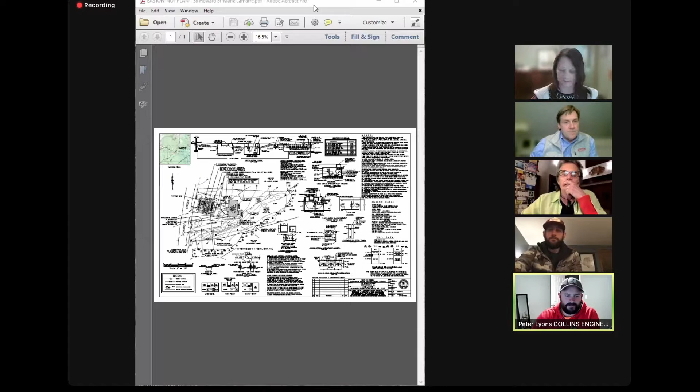Okay, just gonna pull up the plan. Can you guys see that? Kinda, a little small. Yeah, here we go. Thank you. Let's see, all right, we'll start with this.

For the record, Peter Lyons with Collins Civil Engineering Group. We're representing the homeowner tonight for a filing relative to the repair of a failed existing septic system. This is on the east side of Howard Street. The bordering vegetated wetland is on the southern portion of the property and then cuts through the backyard, the eastern portion of the site.

It starts in the woods and then kind of turns into the existing tree line once we get onto the subject property. The 50-foot buffer cuts through the middle of the site, and the 100-foot buffer is out here, basically where our proposed work is.

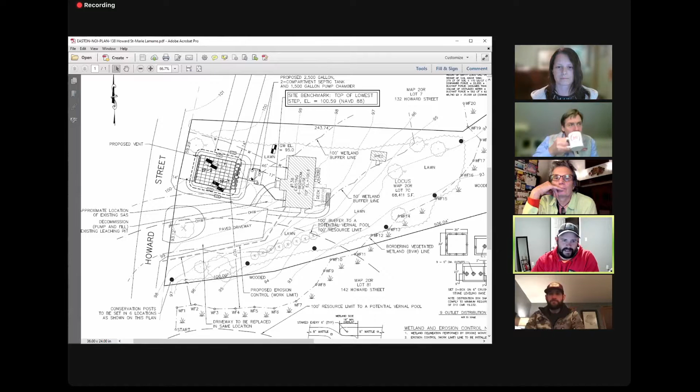So the scope of work for this: we're replacing the existing septic tank with a tank and a pump chamber, and then installing a slightly elevated leaching bed in the front of the property. The general plan is that it's really the corner of the yard that is farthest away from the resource area, without interfering with the existing water line. If we moved any closer to get further away from jurisdiction, we would ultimately have to move the water line.

We only got a couple feet to play with as it is, so that's why we're putting it where we are. The system itself is proposed at 107 feet to the closest wetland flag. The tanks are just inside — it looks like it's about 95 feet to the wetland line.

We have erosion control starting at the corner of the house and wrapping around the existing driveway. That's going to encompass the work area, staging for the trucks and everything, as well as the excavation itself happening for the new system.

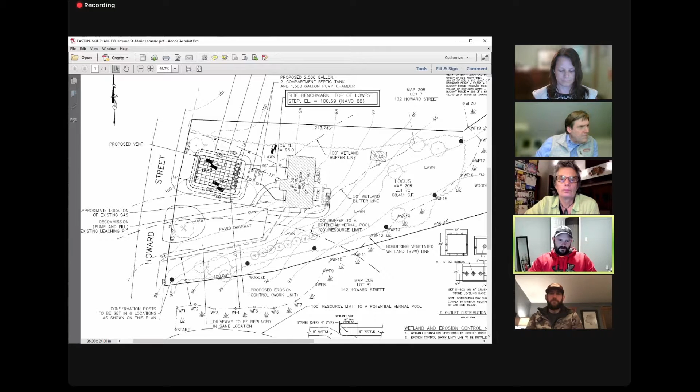All the work's being done in the front yard within the limits of the erosion control. We're proposing conservation posts along the existing tree line, basically paralleling the wetland line. There's a total of 6 posts, I see. Let's see what else, we have...

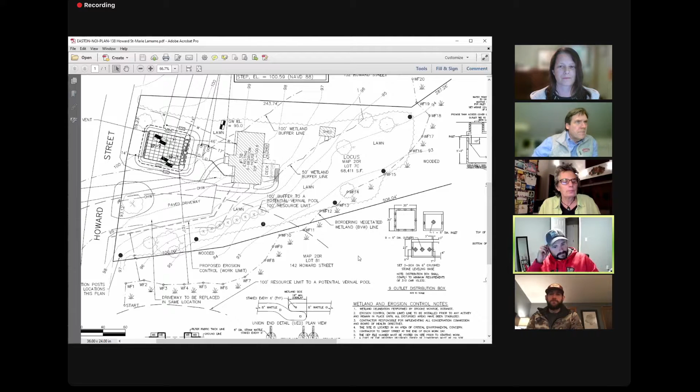Our erosion control details, including a new union detail we've been showing where the wattles are tied together. Other than that, our standard notes — keeping the site clean, file number to be listed on site. Yeah, I guess that's a quick overview. I'll take any questions from the commission.

Jennifer? Peter, did you just want to show us the vernal pool and explain what you're doing to the driveway? All right, let's see.

Yeah, so the vernal pool occurs off-site to the south. We don't show the vernal pool itself on the plan, but this is the 100-foot resource limit to the pool, and then the 100-foot buffer to the resource limit. Correct me if my wording's off there, but yeah, 100-foot buffer to a potential vernal pool resource.

So this is the edge of the resource itself, and then the 100-foot buffer to that cuts through the paved driveway.

Speaking to the driveway, it's to be replaced. It looks like it's going to be the same footprint. So honestly, I wasn't even aware of the driveway thing, but Jen, maybe you know something I don't, but it looks like they're just going to be replacing that driveway. Same elevation, yep, we don't propose any elevation changes. They might adjust the grading, minimally within a couple of inches just to get it back to level, but no significant grading from the looks of the plan.

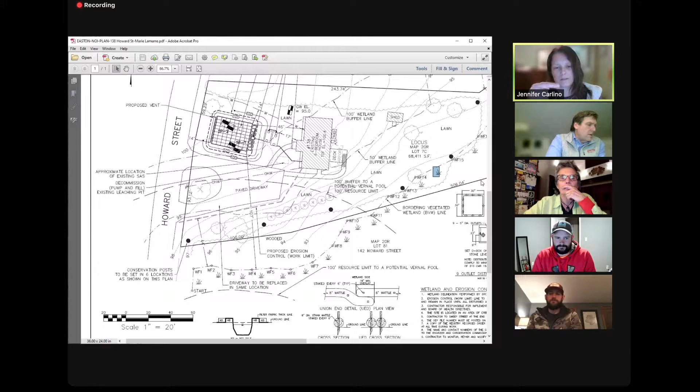If they're grading it toward the vernal pool, it's only going to be an inch or two, as Peter said, and any stormwater would go right into the grass and be filtered there. So I don't think that's going to be an issue for them.

Yeah, I mean, the driveway's pretty level as it currently is configured, so I'm not overly concerned by it. So yeah, they're not changing existing conditions. I think maybe we'll just condition that it is to be no worse than it already is. So I think that's probably the best approach there.

Yeah, I mean, Peter, the one thing on this property is two things. One is they've got to let that grass grow back, and the message has to get to the landowner. There's another one later on, a certificate of compliance coming up where we had a similar issue, where as part of the conditions we'd asked that they stop mowing town property, conservation property, and we were out there checking it end of last week. I checked over the weekend, and they've been mowing it all this time, and they didn't even know.

So I don't know how to ensure that the applicant gets told that in a manner that's something they can take action on. I'm sure that at some point somebody gave them the condition, said, by the way, follow these 5 things, but I think we need to just make sure that that's an actionable item.

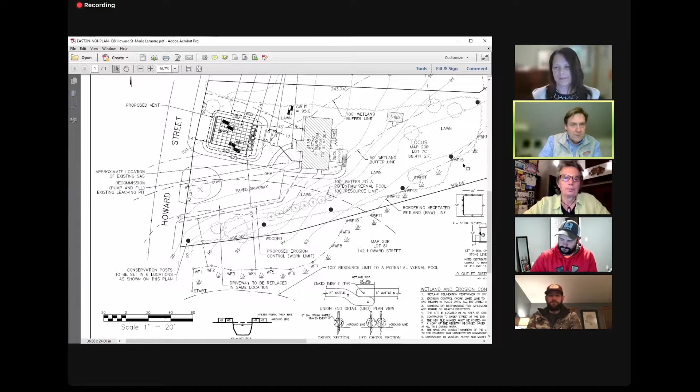Mike, Carol? No. Any public comment on 138 Howard Street? Seeing none. Peter, I assume you want to close. Yes, please. Okay, so I'm going to make a motion to close the hearing and issue an order of conditions for 138 Howard Street.

Noting that between wetland flags 13 and 15, that area should be allowed to grow back and should cease being mowed as lawn. We are going to request that you resubmit a plan having the post medallions moved to the middle of that section, so it's plainly obvious to someone that they should not be mowing there.

Remove the extensive amounts of metals, compost, and trash from wetland flags between WF8 and WF16. I think one other thing is that the existing conditions of the driveway should not be changed to be any more degrading than it currently is towards the vernal pool.

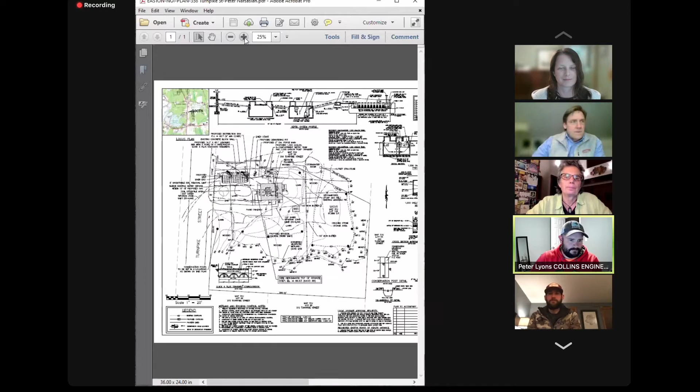Yeah, just bear with me, I'm just trying to pull the drawing up, I just X'd it out. Let's see. All right. Stretch this out a little for us. All right, can we all see what's going on out here?

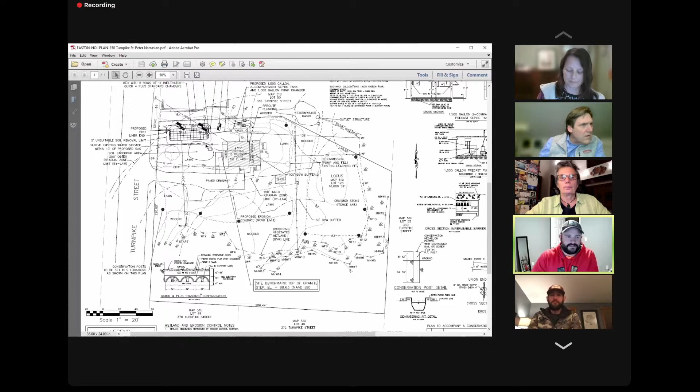Yep, awesome. As mentioned, I believe we do have the property owner with us. I'll give a quick overview of the project, and if you guys want to defer any questions to him, I guess we'll handle it like that. So again, for the record, I'm Peter Lyons with Collins Civil Engineering Group, here tonight relative to a filing for repair of an existing failed septic system at 358 Turnpike Street.

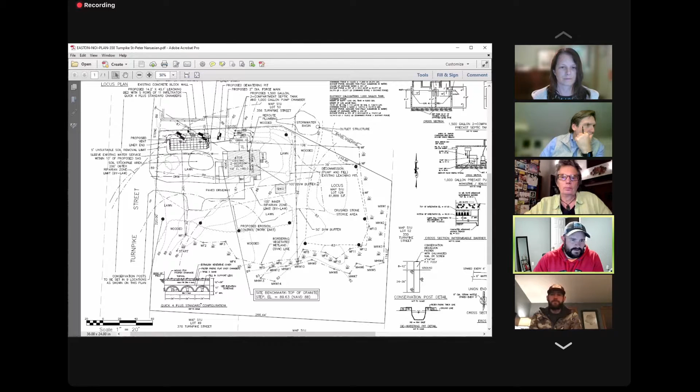This is an existing 2-bedroom home with a failed leaching pit in the back of the property. Kind of a busy site—we have wetland lines around the southern portion, wrapping around the backyard, tying in with an existing drainage basin and a stormwater area and outlet structures. The 50-foot buffer runs through the site here and through the stormwater basin. The 100-foot buffer occurs towards the edge of the property.

So basically we're proposing a leaching field in the northwestern corner of the yard, approximately 104 feet from wetland flag 1. We'll be eliminating the leaching pit in the back of the property, rerouting the plumbing through the house, and providing a new septic tank and pump chamber to a 14 by 40 foot plastic chambered leaching system. There will be minimal change in grade over the proposed tanks as well as the proposed leaching field.

The tanks and the field are outside of the 100-foot buffer, shown right here and across this way. Basically, we're shoving everything as far away from the resources as we can. We have a soil stockpile area out in front of the house, as well as a dewatering location shown on the plan and the detail for that down on the bottom.

Conservation posts shown all over the place. We've got 9 of them along the existing tree line to the south and around the backyard, and additionally around a gravel parking area in the rear of the property.

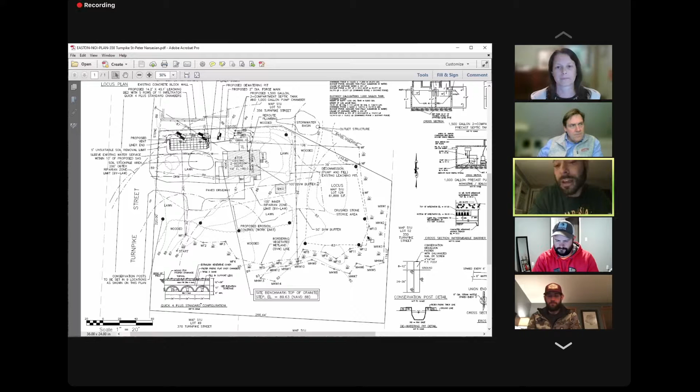There is a lot of junk back there that the old owner left, and I cleaned up what I could. There are things right on the edge of the water that I left because they've been there a long time, big trees growing, so I'm not going to cut down a tree to move something. But this back area was originally used for storage, so I just removed the brush. I followed the fence line because I assumed it was used for that before.

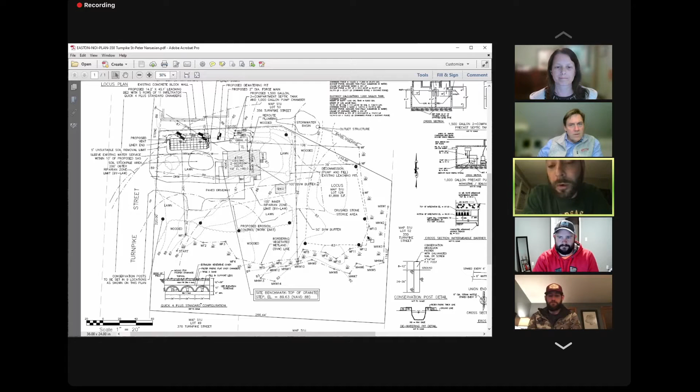When I bought the property, I thought I could do the same thing. But during the site meeting, I said, luckily I own a dumpster company and a landscape company, so I can have my guys pick all the trash up, no problem. And then we were talking about coming up with a plan for the back section. So it's been like that for a couple of years.

Prior to that, I believe this property was in the same family for a very long time. I don't know how long it was a junkyard. There's stuff way out into the woods, even a nice boat out there—it's in two pieces, but it's two pieces of a boat, which obviously I would have pulled out. There was also a go-kart back there, and when I tried to pull it out, it just disintegrated.

With the amount of rain we've had this year, it's been wet out in the wetlands area all year, but in previous years it pretty much dries out. Looks like this week no rain, next week no rain. If that dries out pretty good this week, I'll have my guys pick all the trash out next week.

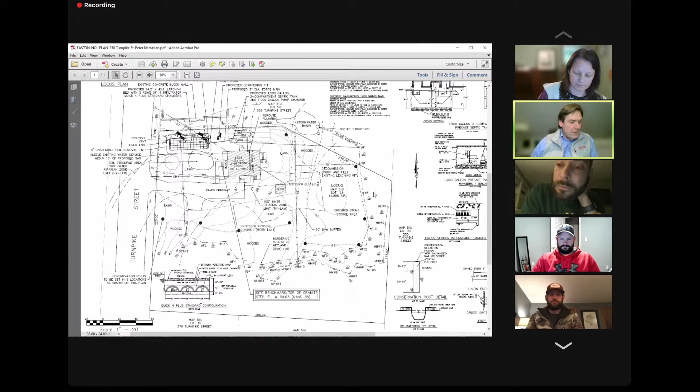Okay, one thing that I hope—Mr. Nersesian, you have a good reputation in town, and you work on a lot of properties—one thing I hope you take away from your own experience here is that you check before you start making substantial changes to the property, just to understand where it is in relation to the wetlands. It's actually something we've been trying to find a way to communicate to property owners, what those questions might be.

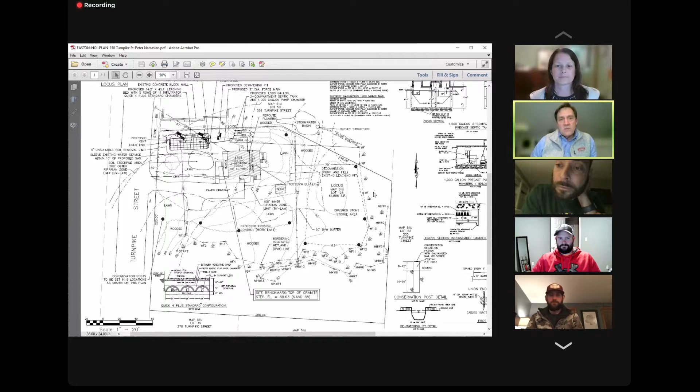Sometimes it's perfectly fine, and other times it's, well, hang on a second, we need to talk to somebody and figure out, and we need to come out and take a look at it. You're probably on hundreds of properties a year in the town of Easton, and probably 50 of those have adjacent wetlands. So it's just the way the town is, as you know.

Yeah, no, I agree. Where that fence is, I guess I wasn't really thinking about it—I just assumed if there's a fence there... because the fence is over 6 feet tall, so I think you need a permit for that. So I just assumed that.

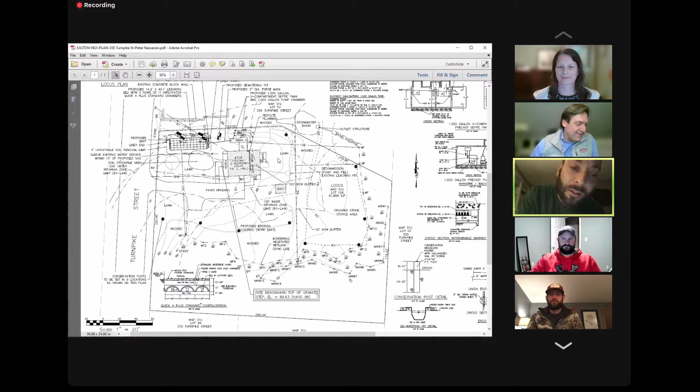Yeah, the fence could have been put up without a permit too. With the condition of the house when I bought it, I'm sure there was a lot of stuff probably not done properly.

Well, the house looks great, so I do want to commend you for that. Thank you for restoring the house. I am trying to make it look nice.

The fence on my other property keeps getting hit by cars between this year and last year. That, and with COVID, we can't get the parts for it. So next year the fence will finally be replaced. But I will make everything look nice.

The only other question I have is, I don't know how far over on the south side of the property, because your neighbor has a lot of stuff in there too. I don't know where that property line is and how much of that stuff is actually his, as opposed to what was left there from the prior junkyard era. That might be something for us to consider and make sure that as we work through this, we have a conversation with the neighbor as well.

I believe the neighbor is a renter, and the person that owns it owns a fence company. My dad knows who it was because he talked to him earlier this year.

I can't remember off the top of my head, but I do think there's a ton of beer cans in there. I am assuming that some of that is just from 138. That's closer to the street, and I don't know when the water fills up if some of it's floated down.

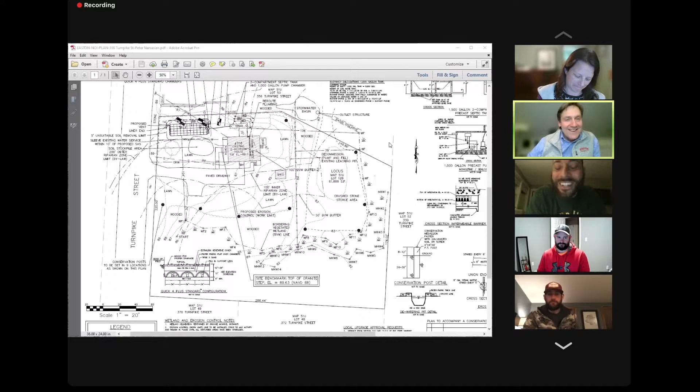Okay, well good luck with that, Peter. Thanks. That goes very well, I can tell you. But I appreciate you making the effort. No problem, I think that's it. So I need a second.

Beatty, a second. Roll call vote: Kallfelz aye. Lundin, aye. Beatty, aye. Okay, thank you. Thank you.

Next up is... Peter. Me again. Yeah, you again. I'm just trying to demote Peter, the other Peter, so.

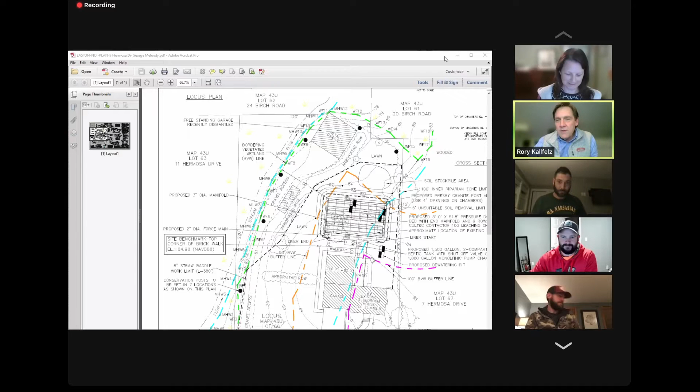Next up is 9 Hermosa Drive. This is the notice of intent for an upgrade of a residential septic system. It says and driveway replacement. Is that true?

No, that was the last. Yeah, I think that might just be a copy error from the last one. Fair enough, I agree. So this is simply an upgraded septic system. Correct.

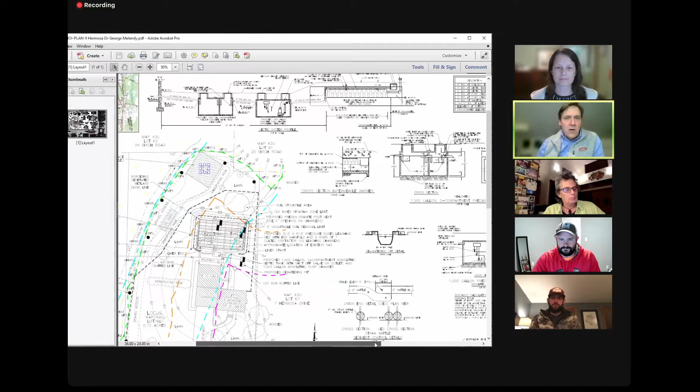So, but as Jennifer said, the metal structure has already been removed. The only thing left there is a log shed that's got firewood in it.

That's it for me. Any questions from anyone else from the commission? Not for me. None for me. Okay, you guys are making it easy on me tonight.

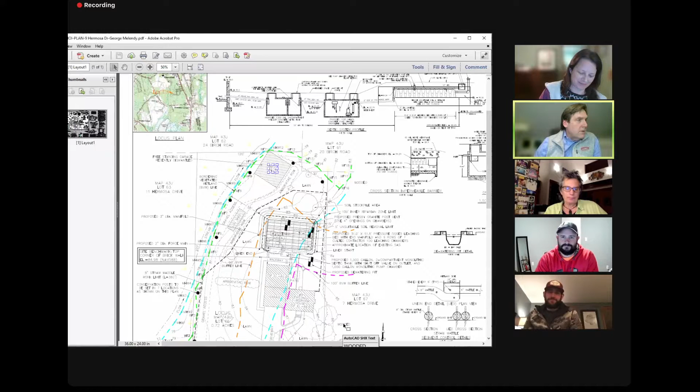Okay, Peter, I assume we want to close. Yes, please. So we're going to make a motion to close and issue a permit for work and order conditions for 9 Hermosa Drive, noting this is for an upgrade of a residential septic system.

I do have a DEP number on this. Was that on the published agenda? I think I might have an early version. This is 1713. DEP, yeah, we do have a number, thanks.

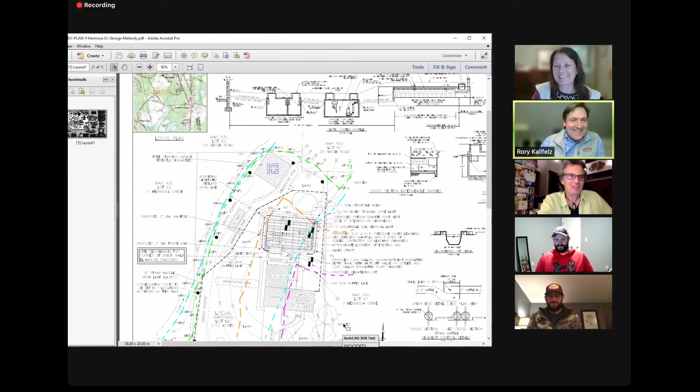Speedy second. Roll call vote: Kallfelz aye, Lundin aye, Speedy aye. Thank you.

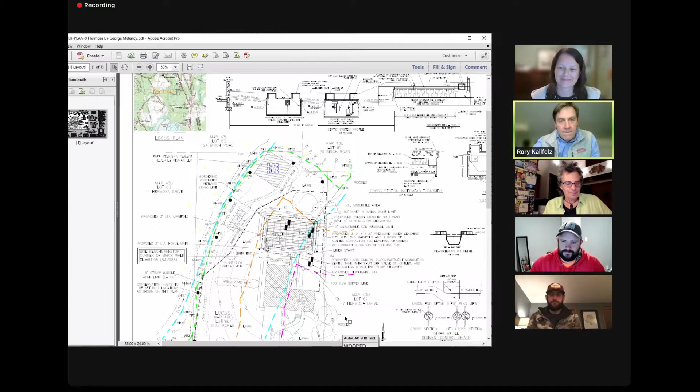Thanks, Peter. All right. Do I gotta stick around for the COCs or?

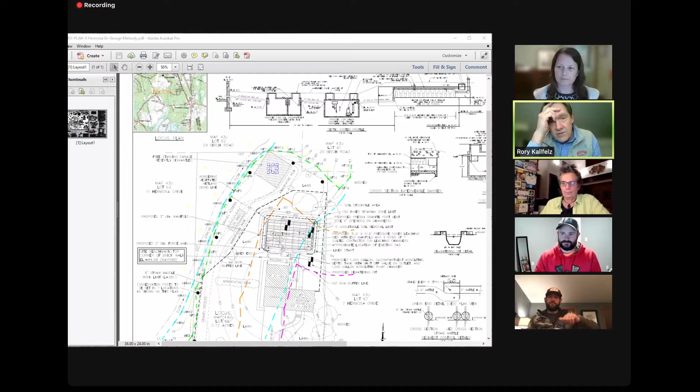Jennifer, did you get any additional information on Gyro Lane today? I did not hear anything else. So we will discuss 15 Gyro Lane. It is unlikely we would approve 15 Gyro Lane without additional information. I was out there Saturday and it was not in a condition that I could approve. Given that I was out there, the commission would probably follow my lead.

So it's up to you whether you want to hear it. You can talk to Jennifer tomorrow or whatever you want to do. Obviously we gotta be made aware of what needs to happen, so either I can check in with Jennifer tomorrow, or I can hang around, and when it comes back up, I'll be here. Whatever makes sense, it's your preference, okay? Thanks, Peter. Okay, thank you.

Okay, I'm gonna bring up Eric Diaz. Let's get a little pop-up window over what I need to click on. Okay, you're coming up, Eric. Oh, I didn't even ask about public comment on this. I'm not doing my job here.

Hello. Hey, Eric. Good evening, everyone. So we are now on 81 Summer Street. This is a notice of intent for installation of underground utilities. Yes, sir. And I'll let you drive the boat. For the record, Eric Dias, registered professional engineer with Strong Point Engineering Solutions, representing Garcon Corp at 81 Summer Street. Very simple notice of intent: we're before you for the installation of underground utilities under an existing driveway. So it's all temporary disturbance in areas that are already disturbed.

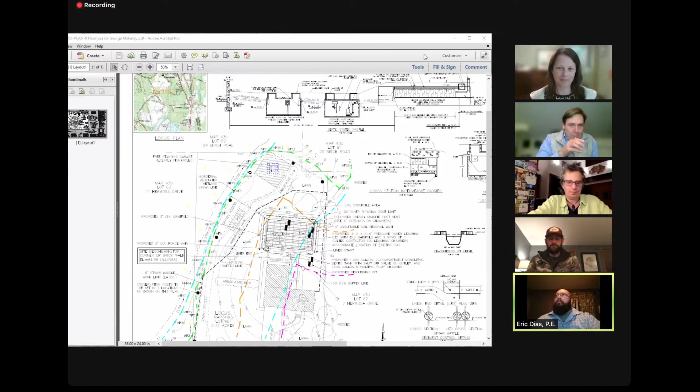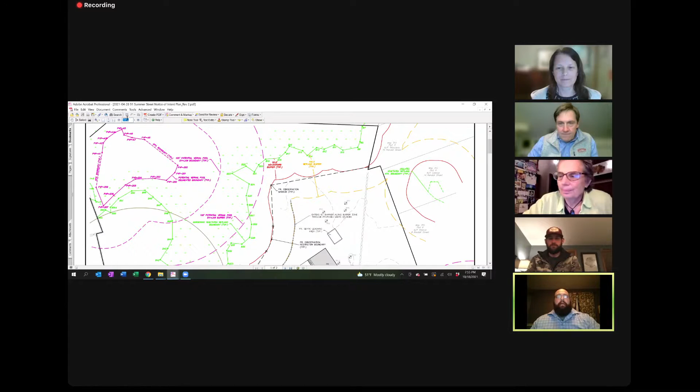Can everyone see the screen? Yep. Okay, so you will recall this is the notice of intent plan for 91 Summer Street. What we proposed was this big long driveway through the buffer zone that ultimately ended up opening up to this big area of upland, where we were proposing one single family home. As a part of this notice of intent, we have a buffer zone restoration that has to move forward, which we acknowledge, and we're prepared to talk about where that stands.

We have a conservation restriction along the 50-foot buffer zone. It totals approximately 9 acres. It is written into the order of conditions, so that remains no matter what we do.

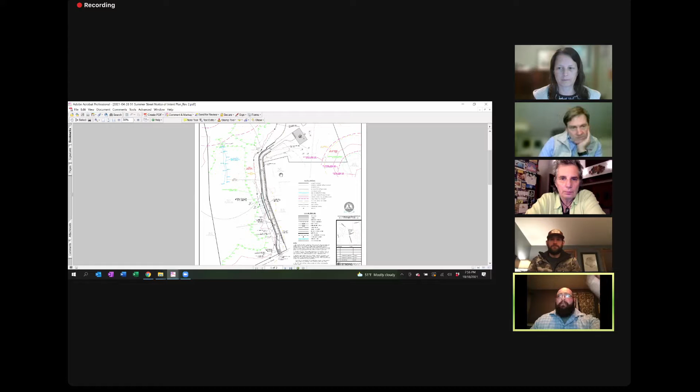If you're looking at this plan, 81 Summer Street is right here. Right at the time that we closed and issued the order of conditions, 81 Summer Street became available, so my client picked it up.

When he did that, here's that same big area of upland back here. But now you can see there's an existing driveway that services 81 Summer Street. So my client had the thought, what if we can subdivide 91 Summer Street to make better use of the upland area and use this existing driveway as a common driveway?

So that's exactly what we did. We went to the planning board. Here are the special permit plans that we submitted to them. The special permit is for both a common driveway to access the upland area here, where we're proposing 3 lots and an estate lot.

All the disturbances that you're seeing in this area here are outside of buffer zones and Conservation Commission jurisdiction, and that's done by design. We're not touching buffer zones. We're staying in that area, utilizing the existing driveway that's there now to come up to this area.

The Easton zoning bylaw says that a common driveway can only serve 3 lots. So as part of what we proposed, we're going to use this existing driveway to provide common drive access to the new 3 lots. And we're going to take the driveway that we had permitted all the way up to here, and pull it way back to access 81 Summer Street.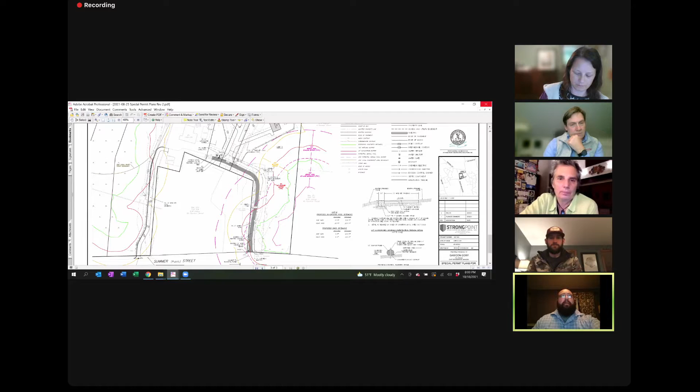The reason I say all this is threefold. One, I think you need the full picture. Two, I'm hopeful that the commission would be willing to support our request to the ZBA, given that it is in the interests of what the commission is trying to protect. And three, because it leads us to where we are tonight, which is the notice of intent for the utility installation through the driveway on 81 Summer Street.

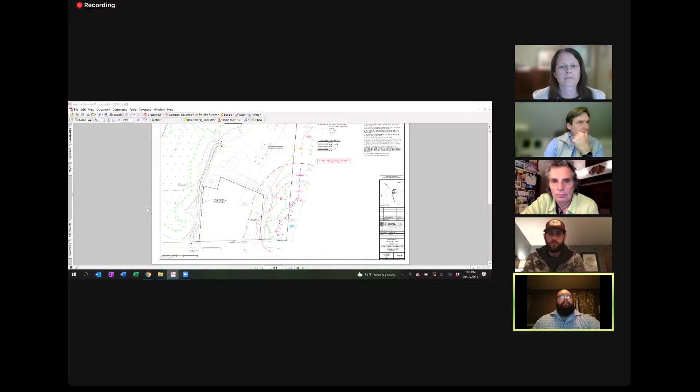Again, this is the notice of intent plan that we submitted. This is the driveway going up to the wetland area that we included just to give the big picture. And then this next sheet focuses in a little bit more—this is the driveway. If you can see, the hatched gray area here is the existing driveway.

Part of what we're being required to do for the 3 units proposed on the common driveway is install this hydrant right here. In order to install that, we need to bring a 6-inch water main in, which we're proposing to bring right up under the driveway. It only comes out of the driveway outside the 100-foot buffer zone, still inside a little bit of the 100-foot buffer zone to the vernal pool, but it stays in disturbed lawn areas and gets us to the hydrant.

The other utility we'll be installing is near a utility pole right here. We're going to come parallel to that in the driveway and trench in electric, telephone, and cable lines. When we get out of the 100-foot buffer zone, we'll leave the driveway, go through currently disturbed lawn areas, and come over to a handhole completely outside of the buffer zones. This allows us to dig one trench, take the dirt, put it on the pavement, install the utility, fill the trench back in, pave it, and seal it up so everything's stable again, then repeat the process on the other side.

So we have a very controlled excavation planned for this. There's not much of a vegetated buffer zone through some areas you'll see here. For example, right here the wetland line goes within 9.5 feet of the existing driveway. So we're proposing to install some sedimentation controls along the existing edge of woods.

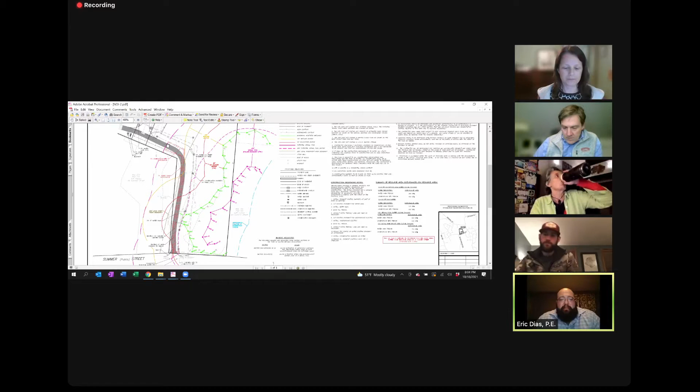I did. We reviewed that section of the bylaw and we concur, so we're going to withdraw the state NOI. There's an existing permit for that exact driveway, and they requested a certificate of compliance for it, which we'll hear at the end of the meeting.

Yes, that's correct. There was a request to be treated as a limited project. Not a lot of people know this, but a limited project only comes up in two cases: you can't meet performance standards, or you're above threshold alteration. Then you look at the list to see if you fit one of the categories, like the driveway. You don't actually need that limited project status because this is an allowable project—you're not above threshold and you're able to meet performance standards.

So you have two trenches in the driveway, and it looks like you're going to be messing up at least half of the driveway. Is there a thought to just redo the whole driveway when they're finished, or are they just going to leave those two patches in the middle of the driveway?

No, there is—in fact we added it to our updated construction sequence. Basically we're going to disturb half of it, put it back together, disturb the other half, put that back together, and then probably top-course pave the whole thing. So it's seamless at the end. Yeah, I actually think that's probably better in the long run because it'll hold up better. I think it will be too, yeah.

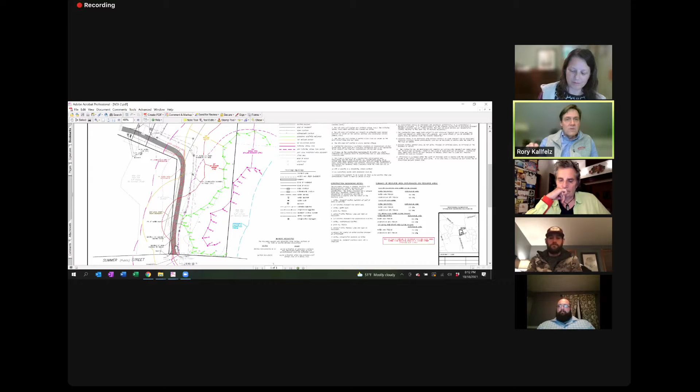And so that would be my goal here, is to say that the Conservation Commission would prefer the single driveway at 81 Summer Street to service all 4 homes rather than having a separate driveway at 91 Summer Street, as it is in benefit of the wetland and wildlife resources to not use that 91 Summer Street if we can avoid it.

So we'll try and condense that down into one sentence so that we can easily get something over to the ZBA. And I just don't want to wordsmith it to death. That's my only concern, I don't want to spend all the time. Yes, I personally am in favor of that.

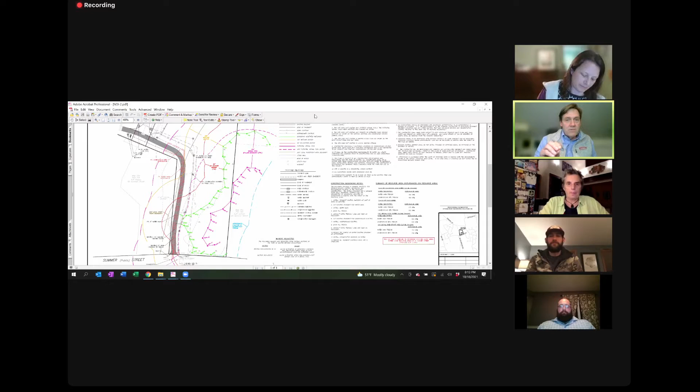Just as a board discussion, I'm in favor of issuing a very brief statement that we would prefer a single driveway at 81 Summer Street to service those 4 homes as opposed to using 91 Summer Street, a new driveway, because it is beneficial to the wetland resources.

I literally wanted to say just like that. I was going to say, why don't you say that? It was great, that's exactly what I wanted to say. You did it, done, there you go. You could just send them a thumbs up emoji, and I think they'd be okay with it. I only added wetland resource protection. That's it, okay, there you go.

One word. So is there any discussion about this? We can take a vote on this so that it's on the record.

Excellent, thank you all, I appreciate that. Thank you, you're up next.

Yes, sir, 19 Emily Lane. So this is a continued hearing, just for the record, continued hearing for notice of intent for construction of an in-ground pool, deck, shed, driveway, and garage.

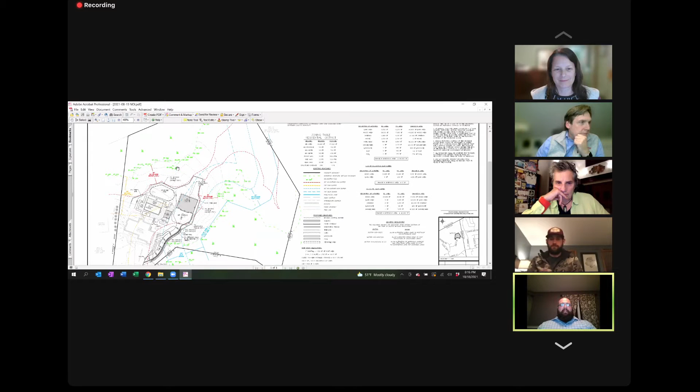Primary area of concern being the driveway through this area coming back to the garage being so close to the wetland. The edge of the driveway is within about 10 feet of this wetland. It required substantial waivers, and I think the chairman said it pretty well that he was having even a tough time seeing a path from here to approval on this. So we took that to heart, went back to the drawing board a bit, and made some pretty global changes to this. I'm going to share that plan with you now.

This is what the revised plan looks like. Let me see if I can zoom in a little bit on the proposed area here. Can you see that a little bit better?

The applicants elected to keep the pool and the patio area around it, albeit revised as much as necessary to accomplish a different configuration of the driveway. The garage is still proposed, however it's turned on its face. It was facing this way before, now it's facing this way.

In the driveway, rather than coming through the 50-foot buffer zone here, very close to the wetland, he's proposing to come around the front of the house this way. We'll be installing a retaining wall on either side of it to make it work, and then wrapping it around the pool and into the garage.

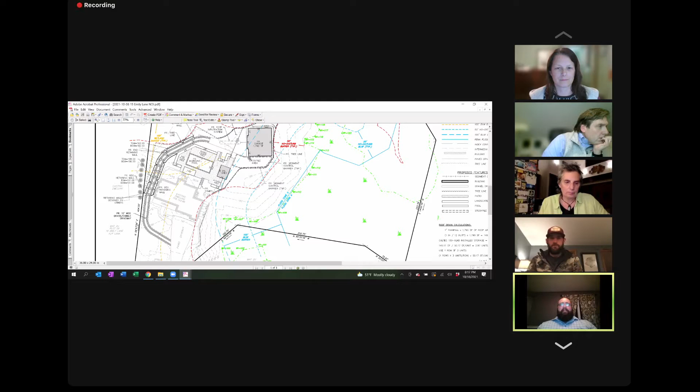Now, a couple of things to note about this. My understanding is this garage is not intended for everyday use. It's intended to store cars or classic cars seasonally, so we're anticipating using this driveway a few times a year to get cars in and out.

Additionally, if I scroll down, we've provided a detail of the driveway. What we're proposing, I'm calling it a driveway, but it's really kind of a cobblestone path. Rather than having a flat area of gravel or pavement, we're proposing two tracks for the vehicle tire path that will be cobblestone we can navigate on, providing a stable base so we don't dig up the grass.

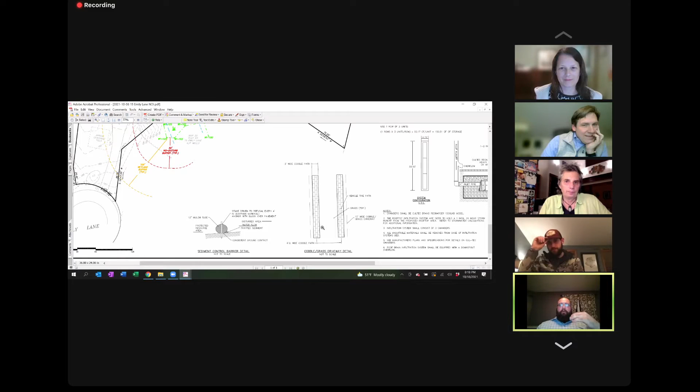But the rest of this thing is going to be pervious area entirely. So we are dealing with more pervious area than what we were talking about with the prior alteration.

The other thing this does, although to be frank it might look a little ugly on paper, is it pulls this completely out of the 50-foot buffer zone. So there's no more need for a waiver on this.

I think overall this is an improvement. I know Jennifer and I had the opportunity to go through this via email, because before we proposed anything formally, I thought, this is a little tenuous. I wanted her thoughts on it, and I won't speak for her, but I think we both concluded the same thing—maybe not the prettiest thing in the world on paper, but it looks a lot better as far as the regulation is concerned.

That said, I know we still have some comments from Jennifer that we will need to address, and I assume there would be more or different comments. So our focus in getting this back to you folks now was to convey the concept, get comments from the commission and from your agent, and then address those as a whole, hopefully wrapping this up at the next meeting if possible.

So that is the gist of it. I'd be glad to entertain any questions and comments.

So Jennifer, you want to make some comments before I jump in? Sure, just very quickly, they don't need waivers anymore now that they've moved everything to the other side of the house.

The items I think we still have left are the sediment control detail, the retaining wall detail. We're going to check the survey on the wetland in the back to make sure the distance was actually the way it looked. If you remember, we went out there and it's a lot closer than the dimensions of the plan. We pulled tape and things weren't lining up quite right, so we're going to double check a bunch of those flags.

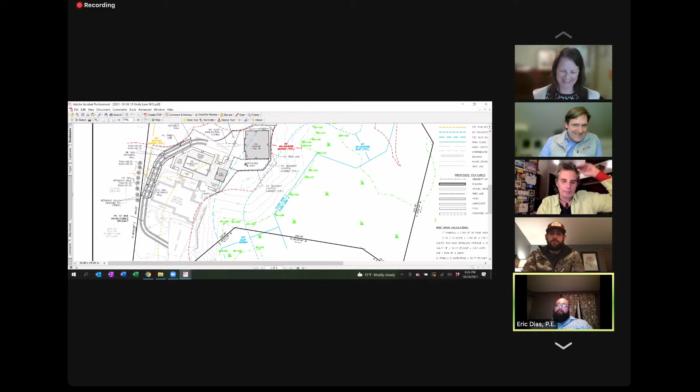No, and again, I apologize on the prior hearing getting that to you the day of. I did not expect you to see that today. Yeah, that's okay, thank you.

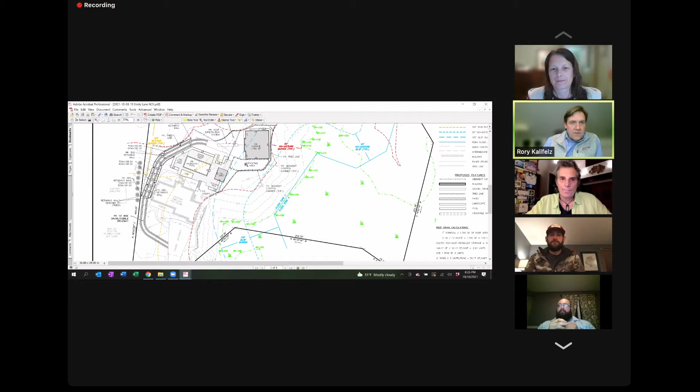Anything else from the applicant? I've got nothing. Nick, I don't know that you have anything you want to add? No, I'm good right now. I appreciate the time, thank you.

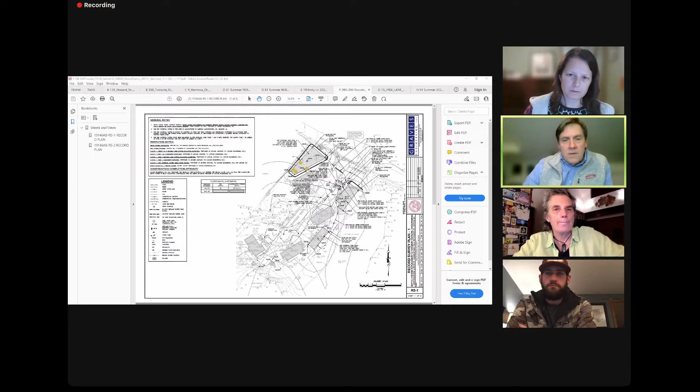Certainly, given that we don't know that the floodplain compensation is documented here, I think we've got to continue this anyway. It'll give them an opportunity to clean up - when we talk about junk, there's like 3 couches and a box spring mattress, at least 3 couches. They're over behind, in the woods. In fact, one configuration I saw looked like they probably used them for a while out there.

My preference, unless there's a difference of opinion here, is to continue this to allow the applicant to first fix the plans, and secondly to take care of the problem with the materials, quote unquote, in the woods. Sounds good, someone want to make a motion? I heard a motion and a second - Lundin, second. We're continuing 390-394 to November 1st. Roll call vote: Kallfelz aye, Lundin aye, Bailey aye.

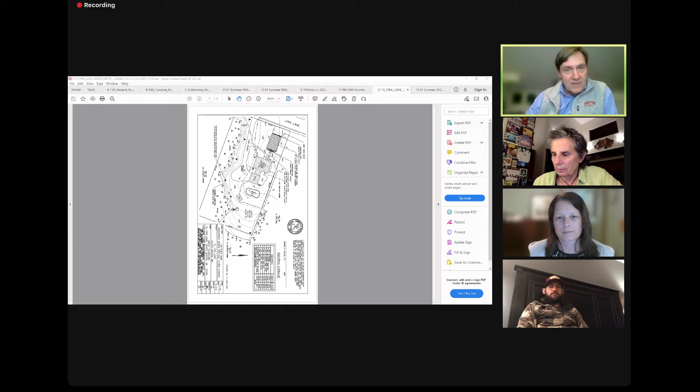We also talked about what these posts meant and the fact that they shouldn't be mowing beyond that. They were right up against the wetland lines, and she understood that when I said it to her. They had pulled a bunch of debris out of the wetlands.

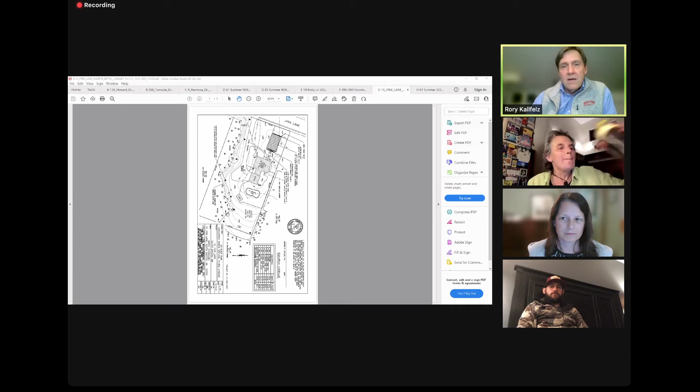When I was there on Saturday, there was still a lot of material in this section - pool stuff that was stored there, some ladders, that kind of thing. She said someone was coming back, I don't know if it was today, to finish that off. So I think she intended to reach out to you today. If she didn't, we'll continue until we get evidence that it's substantially in compliance.

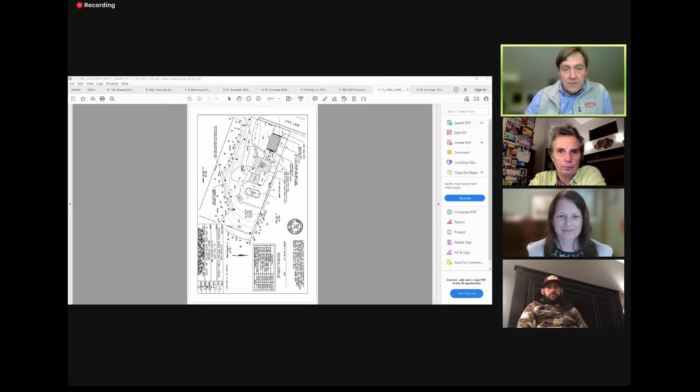We'll talk about the other issue when I get to it during one of your topics. So, a motion to continue 15 Gyro Lane to November 1st. Lundin, second. Roll call vote: Kallfelz aye, Lundin aye, Beatty aye.

81 Summer Street - this is a certificate of compliance on an older permit for that driveway, correct? Jennifer: yep, the existing driveway is done according to the plan. So aside from removing that old sediment control, you can issue a certificate for that one. Any questions from the commission? No.

Make a motion to issue a certificate of compliance for 81 Summer Street on permit number 152-1075 in Easton. Beatty, second. Roll call vote: Kallfelz aye, Lundin aye, Beatty aye.

Next up, we did have a couple sets of minutes, but I had suggested a number of changes to them over the weekend, and I know Tish sent out new copies around 4:30 today. I have not looked at them, so I'd prefer not to review them this hearing if everybody's okay with that. I appreciate the effort in trying to get them to me, but I was tied up all day today. I'd prefer to defer those till next meeting.